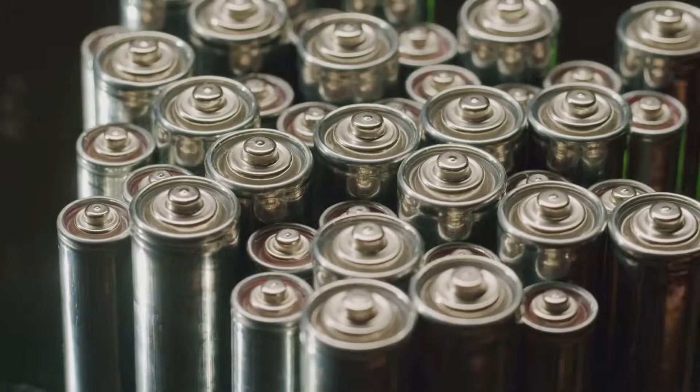Before you even leave the house, you have used many devices, and all of them have one thing in common: they are all powered by batteries. These small, silent power sources are the unseen engines of our modern world. They give life to the technology we depend on every single moment of every single day. We often forget they are there until they run out of power.

Batteries are everywhere. They are not just in the small gadgets we carry. They are in our cars, helping the engine start. They are in our laptops, allowing us to work from anywhere. They are in children's toys, bringing them to life with lights and sounds. They are in medical devices like pacemakers, keeping hearts beating steadily. They even power entire homes during blackouts.

These little packages of energy have quietly become a fundamental part of our infrastructure. Without them, our connected, mobile, and digital society would simply grind to a halt. The world as we know it would look very different.

Think about a world without portable power. Your camera would need to be plugged into a wall. Your remote control would not exist. Your car would need a hand crank to start, just like in the old days. The freedom to move, to communicate on the go, to have information at our fingertips, all of this is made possible by the humble battery.

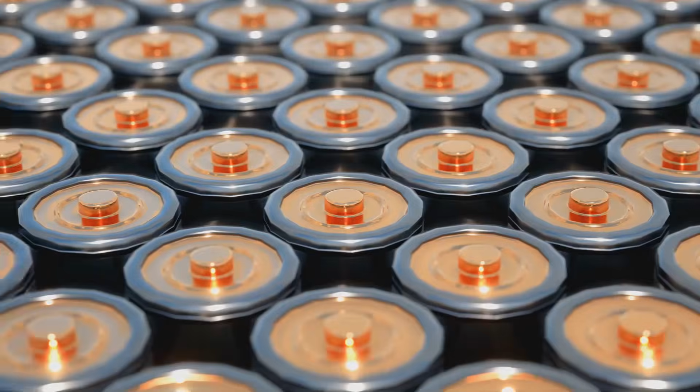It is a technology so successful and so widespread that it has become invisible. We expect our devices to work anywhere, anytime. This expectation is fulfilled by decades of battery innovation. It is a story of science, engineering, and manufacturing working together.

In this essay, we will pull back the curtain on these essential objects. We will journey from their simple beginnings to the complex factories that produce them by the billion. We will explore what a battery actually is and how it works. We will look at the different types, from the tiny cells in a watch to the massive packs in an electric car. Our main destination is the heart of it all, the modern battery factory. We will see how raw materials are transformed into reliable power sources. This is the story of the battery, an object you hold every day but may have never truly seen.

So what exactly is a battery? At its core, a battery is a self-contained chemical power pack. It is a device that stores chemical energy and converts it into electrical energy on demand. Think of it like a tiny, controlled power plant.

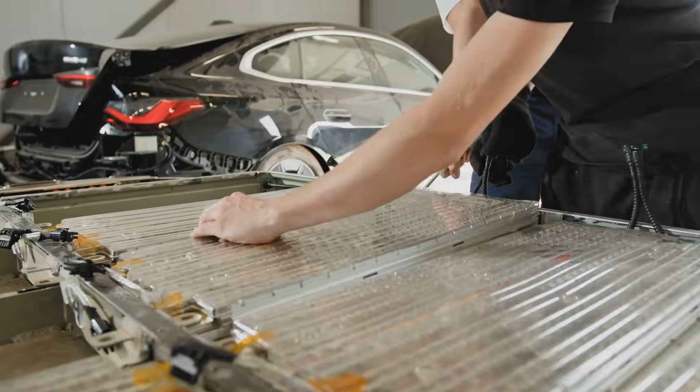Inside every battery, a chemical reaction is waiting to happen. When you put a battery into a device and turn it on, you complete a circuit. This allows the chemical reaction to start. Electrons begin to flow from one part of the battery to another. This flow of electrons is what we call electricity. It is this electricity that powers your device, making it work.

Every battery has three main parts. There is the negative terminal, called the anode. There is the positive terminal, called the cathode. And there is a chemical substance in between, called the electrolyte. The electrolyte separates the anode and the cathode.

When the circuit is closed, a chemical process begins. The anode gives up electrons and the cathode accepts them. The electrolyte acts as a gatekeeper, allowing ions to pass through but forcing the electrons to travel through the external circuit, your device. This journey of electrons is the electric current that brings your flashlight or phone to life. This simple principle is the foundation for all batteries.

However, not all batteries are created equal. Some are designed for single use. Once their chemical reaction is complete, they cannot be recharged. These are called primary batteries, like the common AA or AAA alkaline batteries.

Others are designed to be used again and again. These are called secondary or rechargeable batteries. In these batteries, the chemical reaction can be reversed. By applying an external electrical current, plugging it into a charger, you can restore the battery to its original state, ready to provide power once more.

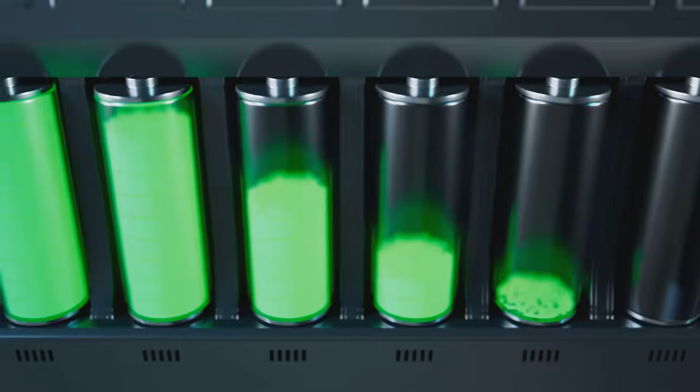This distinction between single-use and rechargeable batteries is crucial. It shapes how we use our technology and how we think about energy. A disposable battery in a smoke detector is perfect for long-term, low-power use. A rechargeable lithium-ion battery in a smartphone is essential for a device that is used heavily every day. The science inside each type is tailored for its specific job. Understanding this difference is the first step to appreciating the incredible engineering that goes into designing and manufacturing each and every battery we rely on. It is a universe of chemistry in a small, portable package.

The story of the battery did not begin with the digital age. It began over 2 centuries ago with a curious observation involving frog legs. In the late 1700s, an Italian scientist named Luigi Galvani noticed that a dead frog's legs would twitch when touched with 2 different types of metal. He believed this was due to animal electricity.

However, another Italian scientist, Alessandro Volta, had a different idea. He suspected the electricity was not coming from the frog, but from the metals themselves. This disagreement sparked a scientific revolution and set the stage for a world powered by portable energy.

To prove his theory, Volta created what is now known as the voltaic pile in the year 1800. He stacked alternating discs of zinc and copper, separating them with pieces of cardboard soaked in salt water. When he connected a wire to the top and bottom of the stack, it produced a steady, reliable electric current. This was the world's first true battery.

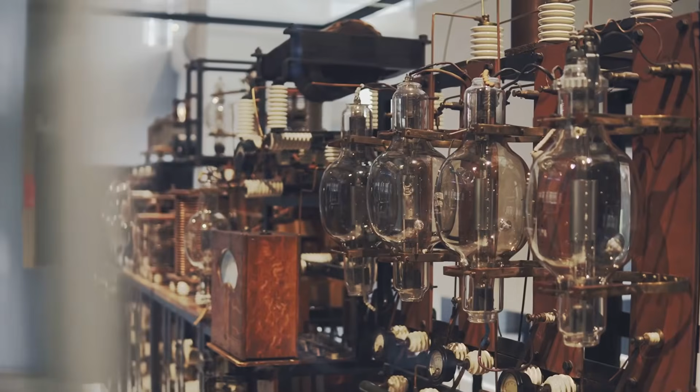Following Volta's breakthrough, the 19th century became a golden age for battery development. Scientists and inventors across Europe and America tinkered with different chemicals and materials to create better, longer-lasting batteries. In 1836, the Daniell cell improved on Volta's design, making it safer and more practical. Then, in the 1860s, the French inventor Georges Leclanche developed a new battery using a zinc anode and a manganese dioxide cathode. This design, known as the Leclanche cell, was the direct ancestor of the common zinc-carbon batteries that powered the first flashlights and radios for decades.

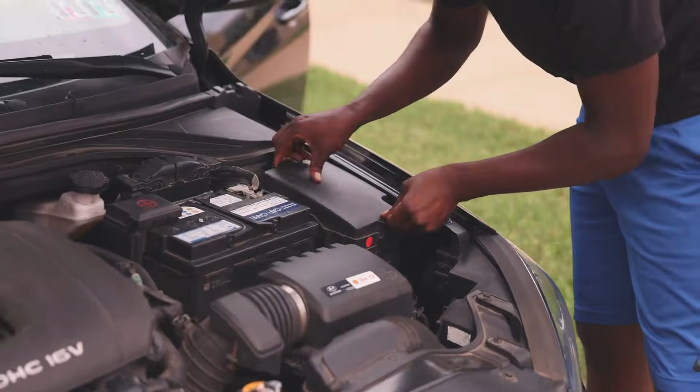The invention of rechargeable batteries marked another huge leap forward. In 1859, Gaston Plante created the first practical lead-acid battery. This was the first battery that could be discharged and recharged multiple times, making it incredibly useful for storing energy. This is the same basic technology that is still used in the car battery under the hood of most gasoline-powered vehicles today.

From a twitching frog leg to a stack of metal discs to the first rechargeable cell, these early discoveries laid the chemical and electrical groundwork for the billions of batteries that are manufactured in factories around the globe today.

Our journey into the world of batteries now brings us to the present day. We have seen how a simple chemical principle powers our lives. We have touched on the long history of invention that made it all possible. Now it is time to step inside the place where this magic happens, the modern battery factory.

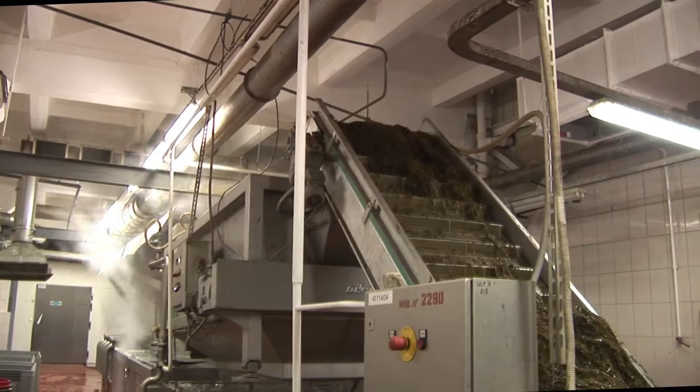These are not simple workshops. They are highly advanced, incredibly clean, and precisely controlled environments. Here, raw materials like lithium, graphite, manganese, and zinc are transformed into the sleek, powerful batteries we know and use every day. It is a process of immense scale and precision.

In the sections that follow, we will take a detailed tour of one of these amazing facilities. We will follow the journey of a battery from start to finish. Our tour will begin with the raw materials.

We will see how massive rolls of metal foil are coated with carefully mixed chemical slurries. This step is the heart of the battery, creating the anode and cathode that will store and release energy. The precision required here is astonishing. The thickness of these coatings must be controlled down to the micron, a fraction of the width of a human hair, to ensure the battery performs reliably and safely.

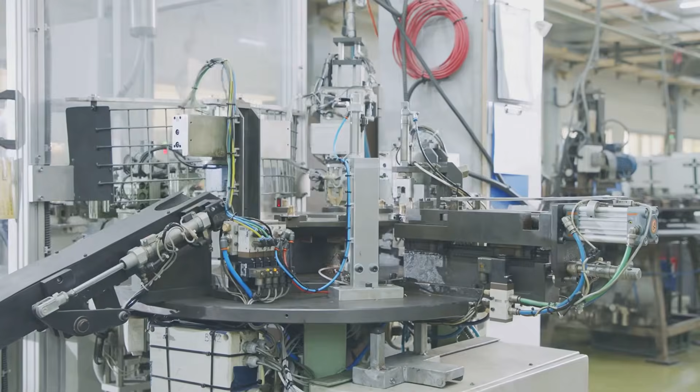Next, we will move to the assembly line. Here, the coated foils are cut, stacked, or wound into tight spirals, depending on the type of battery being made. Whether it is a cylindrical AA cell or a flat rectangular smartphone battery, the process is one of meticulous layering. The anode, cathode, and a special separator film must be perfectly aligned to prevent short circuits. Much of this work is done by automated machines in dry rooms, which have extremely low humidity. This is because the chemicals inside are highly sensitive to moisture, which can ruin a battery before it is even finished.

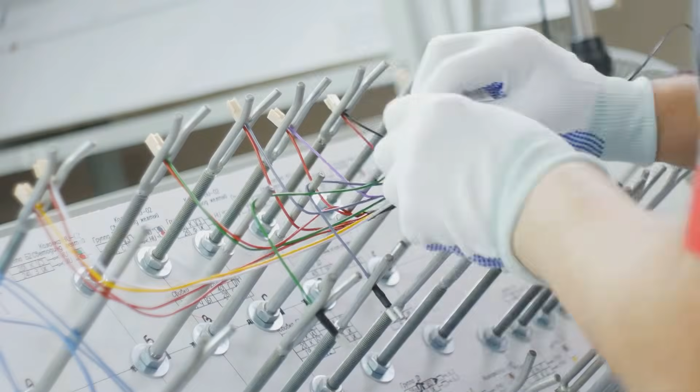Finally, we will witness the finishing touches. The assembled battery components are placed into their final casing. A small amount of electrolyte is injected, and the cell is sealed. But the process does not end there. Every single battery must undergo a series of rigorous tests. It will be charged and discharged, checked for leaks, and tested for its capacity and voltage. This quality control is essential to ensure that every battery that leaves the factory is safe, reliable, and ready to power our world. This behind-the-scenes look will reveal the hidden complexity behind one of modern life's most essential products.

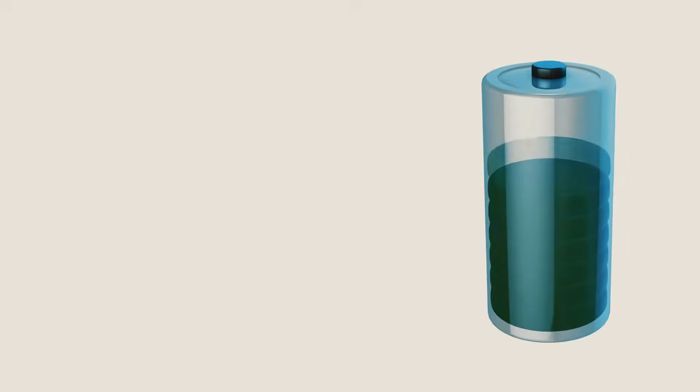Our story of the battery often begins in the 18th century, but some discoveries suggest a much older origin. In 1936, workers excavating a village near Baghdad, Iraq, unearthed a curious artifact: a small clay jar about 5 inches tall. Inside was a copper cylinder, and suspended within it was an iron rod, held in place by an asphalt plug.

Archaeologists dated the object to the Parthian period, around 250 BC. Named the Baghdad Battery, this object has puzzled historians and scientists ever since. Its construction bears a striking resemblance to a simple galvanic cell, the basic structure of a battery. Could ancient civilizations have harnessed electricity?

The theory is, honestly, quite tantalizing. If the jar were filled with an acidic liquid such as vinegar or grape juice, it could have produced a small but noticeable electric voltage. While there is no direct evidence of wires or devices it might have powered, its design is undeniably provocative. Some scholars speculate it could have been used for electroplating, coating one metal with a thin layer of another, like silver or gold. This would have required a low, steady current, exactly what a simple battery like this could provide, explaining a level of craftsmanship in ancient artifacts that has long been admired.

Other experts remain skeptical, proposing alternative functions for the mysterious jar. Perhaps it was simply a vessel for storing sacred scrolls, with the metals and asphalt serving to protect the delicate papyrus from the elements. The metals might have degraded over time, leaving behind the structure we see today. Without any accompanying written records describing its use, the true purpose of the Baghdad battery remains shrouded in mystery. There is no definitive proof that our ancestors understood the principles of electrochemistry.

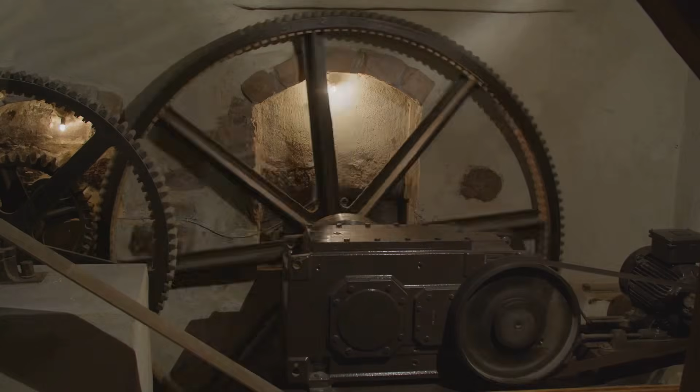The object stands as a fascinating anomaly, a what-if in the long history of human invention and discovery. Whether it was a true battery or a simple container, the Baghdad battery forces us to reconsider the timeline of technology. It serves as a powerful reminder that the spark of human ingenuity is not confined to one time or place. The desire to understand and manipulate the world around us is an ancient one.

While the verifiable history of the battery begins much later, this small clay pot from ancient Mesopotamia hints that the fundamental components of electrical discovery may have been in our hands for millennia, just waiting for the right mind to connect the pieces and unlock their incredible potential. It is, truly, an electrifying prologue to our story.

Before Alessandro Volta could build his famous pile, the world first needed to understand electricity itself. For centuries, the only known form of electricity was static electricity. The ancient Greeks knew that rubbing amber with fur would cause it to attract light objects like feathers. The Greek word for amber is electron, which is actually where our word electricity comes from.

For over 2,000 years, this strange, attractive force remained a mere curiosity, a bit of a parlor trick for the wealthy and a subject for philosophical debate. It was a force that could be created in a brief spark, but could not be sustained or harnessed for any practical use. The 17th and 18th centuries, a period known as the Age of Enlightenment, changed everything.

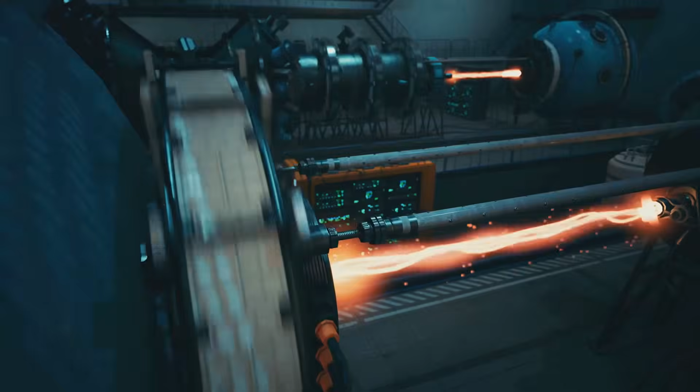This was an era of intense scientific inquiry, where observation and experimentation replaced superstition. Scientists began to systematically investigate the properties of static electricity. Inventors created machines with spinning glass globes and friction pads that could generate large amounts of static charge. One of the most significant inventions was the Leyden jar in 1745, the first device capable of storing a significant electrical charge. It was, in essence, the first capacitor, a close cousin to the battery.

The Leyden jar allowed for more powerful and dramatic experiments. Benjamin Franklin famously used one in his legendary kite experiment in 1752, proving that lightning was a form of electricity. These experiments captured the public imagination and spurred further research.

However, the Leyden jar had a major limitation. It could store a charge, but it released it all at once in a single, powerful spark. It could not provide a continuous flowing current. The world still lacked a source of electricity that was steady and controllable, something that could do more than just create a momentary flash of light or a jolt. This is where the stage was set for the next great leap forward.

The scientific community was buzzing with questions about the nature of electricity. They had learned how to generate it, store it, and discharge it in a burst. They had even begun to suspect a link between electricity and chemical processes, thanks to experiments like those of Luigi Galvani and his twitching frog legs. All the necessary ingredients were there: the metals, the chemical knowledge, and the burning curiosity. The world was waiting for someone to put them all together in the right way to create not just a spark, but a continuous, life-altering flow.

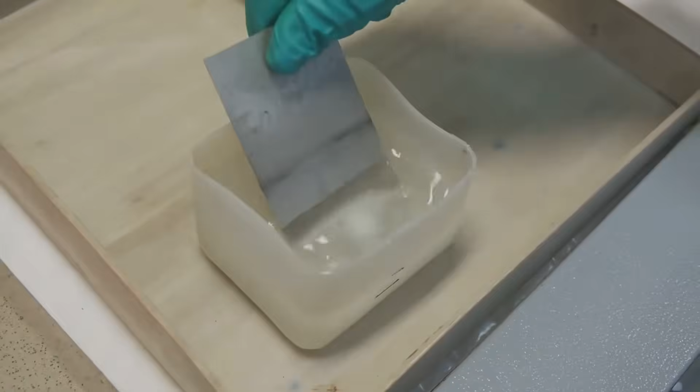The critical breakthrough came from a scientific disagreement. Luigi Galvani believed the electricity he observed came from the frog's tissue, a form of animal electricity. But Alessandro Volta, a professor of physics at the University of Pavia, was not convinced. He hypothesized that the current was generated not by the animal, but by the contact between two different metals in a moist environment. To prove his point, he set out to create an artificial source of electricity, one that required no living tissue whatsoever. He wanted to replicate the effect using only inorganic materials, to show the world the true source of this power. After extensive experimentation, Volta announced his success in a letter to the Royal Society of London in 1800.

His invention was elegantly simple. He created a stack, or pile, of alternating discs of two different metals, typically zinc and copper. Between each pair of metal discs, he placed a piece of cardboard or cloth soaked in brine, which is salt water or a weak acid. This soaked material acted as the electrolyte. When he connected a wire to the top and bottom of this tall stack, it produced a stable and continuous electric current, far more useful than the fleeting spark of a Leyden jar. The voltaic pile was born.

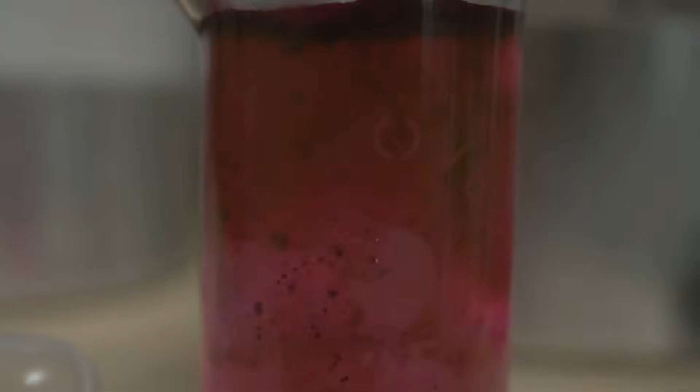This invention was nothing short of revolutionary. For the very first time in history, humanity had a reliable and lasting source of electricity. Volta's pile was not just a scientific curiosity, it was a practical tool. Scientists could now perform experiments that were previously impossible. They could study the effects of a continuous current on chemical compounds, a field that became known as electrochemistry. Sir Humphry Davy, for example, used a massive voltaic pile to isolate new chemical elements like sodium and potassium for the first time, proving they existed within common compounds. The battery had become an engine of discovery.

Volta's achievement fundamentally changed our relationship with energy. It demystified electricity, moving it from the realm of natural phenomena like lightning into the world of controlled, man-made technology. The pile proved that electricity could be generated through a chemical reaction, stored, and then released in a controlled flow. This was the foundational principle upon which all modern batteries are built. Every time you charge your phone or start your car, you are using a direct descendant of Volta's humble stack of metal discs and salty cardboard. His invention did not just create a current, it opened the floodgates for the electric age.

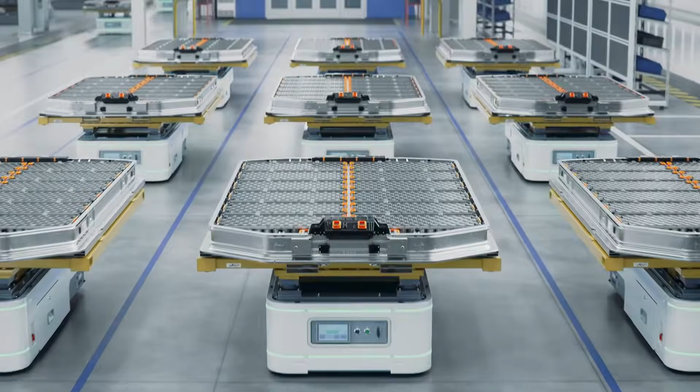With the blueprint provided by Volta, the 19th century witnessed a flurry of innovation in battery technology. Scientists and inventors immediately began to work on improving the voltaic pile, which, for all its brilliance, had its flaws. The original pile could not provide a strong current for very long, and it had a tendency to leak its corrosive electrolyte. The race was on to build a better battery, one that was more powerful, longer lasting, and more practical for a wider range of applications. This period became a kind of chemical arms race, with each new design attempting to outperform the last.

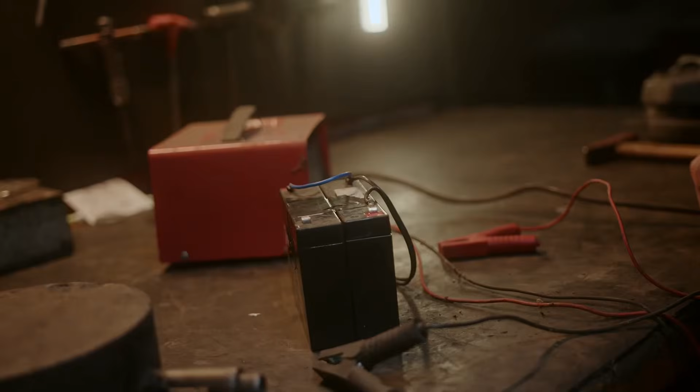A significant improvement arrived in 1836 with the Daniell cell, invented by British chemist John Frederick Daniell. His design cleverly solved the pile's biggest problem, a phenomenon called polarization, where hydrogen bubbles would form on the copper electrode, reducing the battery's effectiveness. Daniell's cell used two different electrolyte solutions separated by a porous clay pot. This prevented the bubble formation and resulted in a much more stable and reliable current. The Daniell cell became the first truly practical source of electricity for new technologies like the telegraph, which required a steady voltage over long periods.

The next major leap forward was the development of the wet cell by French inventor Georges Leclanché in the 1860s. His design used a zinc anode and a manganese dioxide cathode mixed with carbon powder, immersed in a jar of ammonium chloride solution. The Leclanché cell was more robust, cheaper to produce, and required less maintenance than the Daniell cell. More importantly, it laid the groundwork for the first dry cell.

By adapting Leclanche's chemistry into a sealed, paste-based electrolyte, inventors created the first portable batteries, paving the way for consumer devices like the flashlight. Perhaps the most impactful invention of this era was the first rechargeable battery.

In 1859, French physicist Gaston Plante developed the lead-acid battery. He placed two sheets of lead, separated by a rubber strip, into a solution of sulfuric acid. By passing a current through the cell, he could charge it, and then the cell could discharge to provide power. The process was reversible. This was a monumental breakthrough.

For the first time, electrical energy could be stored for later use. Plante's basic design is so effective that it remains the core technology for the starter batteries found in virtually all gasoline-powered cars today.

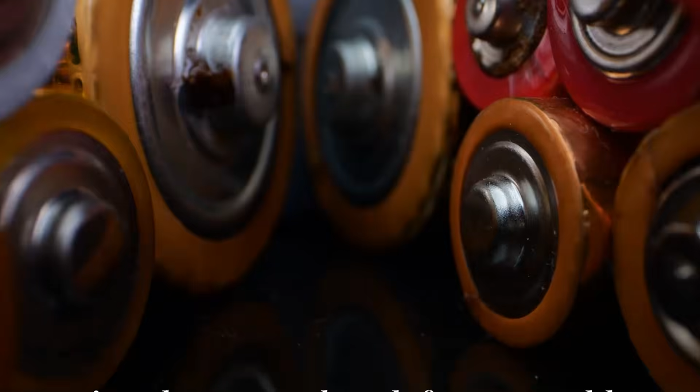By the end of the 19th century, the fundamental science of the battery was firmly established. The pioneering work of Volta, Daniell, Leclanche, and Plante had created a diverse toolkit of electrochemical solutions. These were no longer just laboratory curiosities. They were becoming essential components of an increasingly industrial and interconnected world.

Telegraph networks that spanned continents relied on steady currents from Daniell cells. Early telephone systems used Leclanche cells to power their signals. The groundwork had been laid for a world where power was no longer tethered to a large, stationary generator.

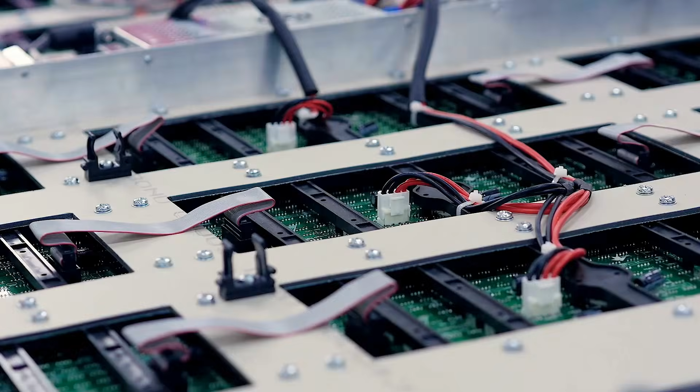The development of the dry cell was a critical turning point in making this power personal and portable. By replacing the liquid electrolyte with a moist paste, batteries could be sealed, made in various sizes, and used in any orientation without spilling. This innovation, commercialized in the 1880s, unlocked a world of possibilities. It led directly to the first consumer battery-powered device, the flashlight, introduced in 1899.

Suddenly, people could carry a source of light in their pockets. This simple convenience was a profound shift, demonstrating the liberating potential of portable power for the average person.

This era of discovery defined the core chemistries that would dominate the battery market for the next century. Zinc-carbon batteries, direct descendants of the Leclanche cell, would power radios, toys, and gadgets for decades. Lead-acid batteries, born from Plante's invention, became the standard for transportation and industrial energy storage, a role they still hold.

The principles of using a chemical reaction to create a flow of electrons, and in some cases, reversing that reaction, were now well understood. The focus of innovation began to shift from pure discovery to manufacturing, refinement, and cost reduction.

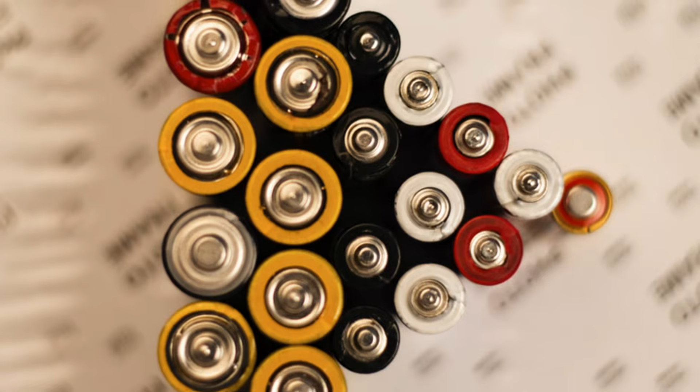The spark of discovery, which began with a twitching frog leg and was fanned into a flame by Volta's pile, had now become a steady, reliable burn. The scientific foundation was complete. Humanity had learned how to bottle lightning.

The next chapter in the story of the battery would not be about inventing the first cell, but about learning how to produce billions of them. The challenge moved from the scientist's laboratory to the engineer's factory, setting the stage for the mass production that would truly power the modern world and all the devices we now take for granted.

When you think of a battery, the first image that probably comes to mind is the small, familiar cylinder of a AA or AAA cell. These are the undisputed workhorses of the battery world, powering countless devices in our homes. From the television remote control to your wireless mouse, from children's toys to wall clocks, these batteries are everywhere.

They are a perfect example of a primary battery, meaning they are designed for single use. Once the chemical energy inside them is depleted, they are meant to be disposed of, hopefully through recycling. Their widespread use comes down to their reliability, low cost, and standard sizing.

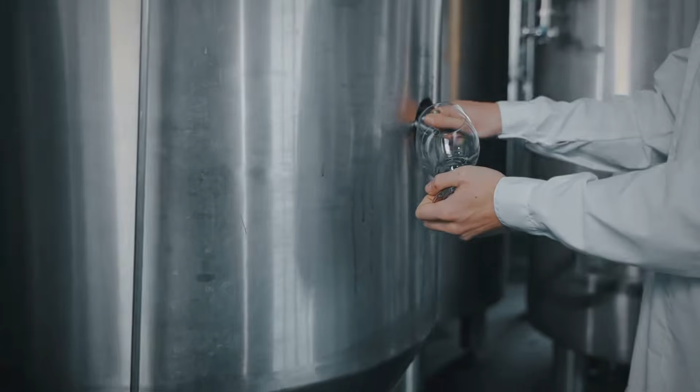These common batteries are most often alkaline batteries. This name refers to the chemistry inside them. They use zinc for the negative electrode, or anode, and manganese dioxide for the positive electrode, or cathode. The key ingredient that gives them their name is the electrolyte, which is a potassium hydroxide solution, a strong alkaline substance.

This chemical combination is more potent and energy-dense than the older zinc-carbon batteries they replaced. This means an alkaline battery can last much longer and provide a stronger, more consistent power output, making it ideal for devices that need a bit more energy, like a digital camera's flash or a motorized toy.

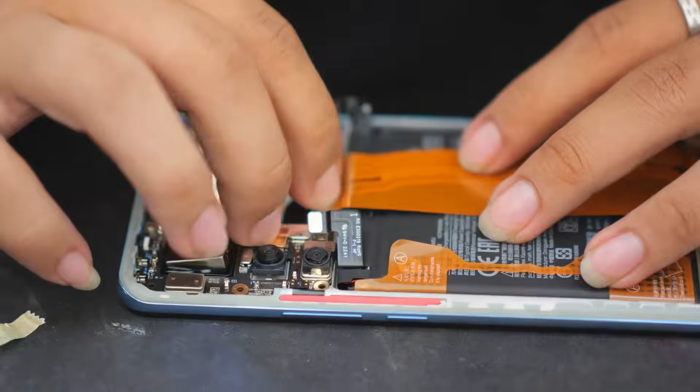The genius of these batteries lies not just in their chemistry, but in their standardized design. The AA, AAA, C, and D cell sizes were established decades ago to create a universal system for portable devices. This means you can buy batteries from any brand, anywhere in the world, and be confident they will fit your device.

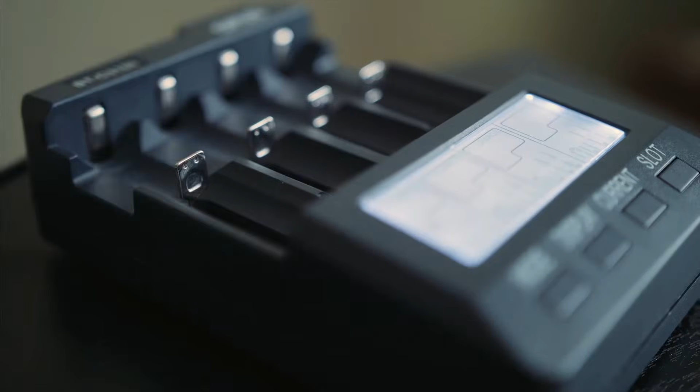Before the dominance of lithium-ion, two main types led this charge: nickel-cadmium, or NiCd, and nickel-metal hydride, or NiMH. These batteries, often made in the same familiar AA and AAA sizes, offered a revolutionary proposition.

Instead of throwing a battery away when it died, you could simply place it in a charger and use it again, hundreds of times. This was honestly a game changer for devices like portable music players, early digital cameras, and handheld video game consoles.

Nickel-cadmium batteries were among the first widely available rechargeable options. They were rugged and could deliver a high current, making them excellent for power tools and other high-demand applications.

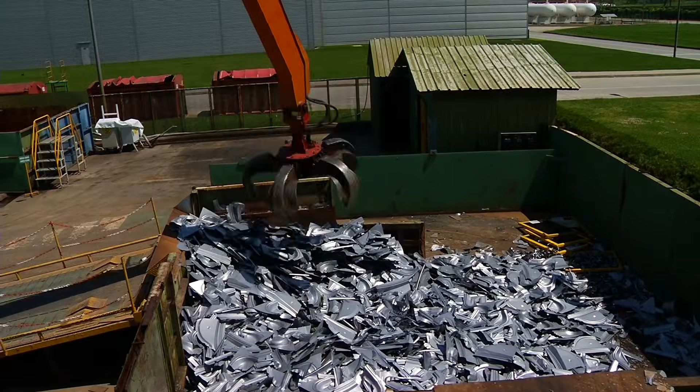However, they had a few significant drawbacks. The cadmium used in them is a highly toxic heavy metal, making their disposal an environmental concern. More famously, NiCd batteries suffered from what's called a memory effect.

If you repeatedly recharged them before they were fully drained, they would remember this shorter cycle, and their total capacity would appear to decrease over time, which was a frustrating quirk for users.

To address these problems, the nickel metal hydride, or NiMH, battery was developed. It offered a significant improvement over its predecessor. NiMH batteries have a higher energy density, meaning they can store more power in the same size cell, allowing your devices to run longer on a single charge.

They also do not suffer from the severe memory effect of NiCd batteries, making them much more user-friendly. Most importantly, they are made with more environmentally friendly materials, replacing the toxic cadmium with a hydrogen-absorbing alloy.

This made NiMH the preferred rechargeable choice for consumer electronics throughout the 1990s and 2000s. The rise of NiCd and NiMH batteries marked a fundamental shift in how we thought about portable power. It introduced the concept of an energy cycle: use, recharge, repeat.

This not only saved consumers money in the long run, but also represented a step toward greater sustainability by reducing the number of single-use batteries being thrown away.

While they have now been largely surpassed by newer technologies for high-performance devices, NiMH batteries are still widely used today in many household applications. They represent a crucial bridge between the disposable battery era and the fully rechargeable world we now live in.

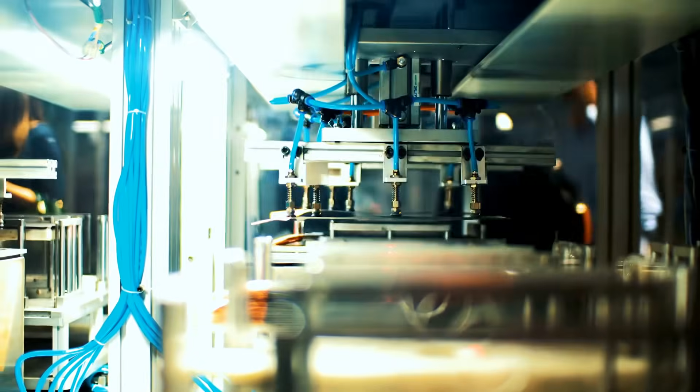Today, one type of battery reigns supreme over the world of high-performance portable electronics, the lithium-ion battery. If you think about it, your smartphone, your laptop, your wireless headphones, or your tablet, they are all powered by this incredible technology.

Lithium-ion or Li-ion batteries have completely transformed our digital lives by offering an unmatched combination of high energy density, lightweight, and excellent rechargeability. They can pack a huge amount of power into a very small and light package, which is exactly what modern, slim, and powerful personal devices require.

This is the technology that untethered us from the wall socket.

The secret to the lithium-ion battery's success lies in its core component, lithium. Lithium is the lightest of all metals and has fantastic electrochemical properties, meaning it can store and release a large amount of energy.

Inside a Li-ion battery, lithium ions shuttle back and forth between the anode, which is typically made of graphite, and the cathode, which is made of a lithium metal oxide, during charging and discharging.

This process is incredibly efficient and can be repeated hundreds or even thousands of times with very little degradation. Unlike NiCd batteries, Li-ion batteries have no memory effect, so you can top them up whenever you like without harming their long-term capacity.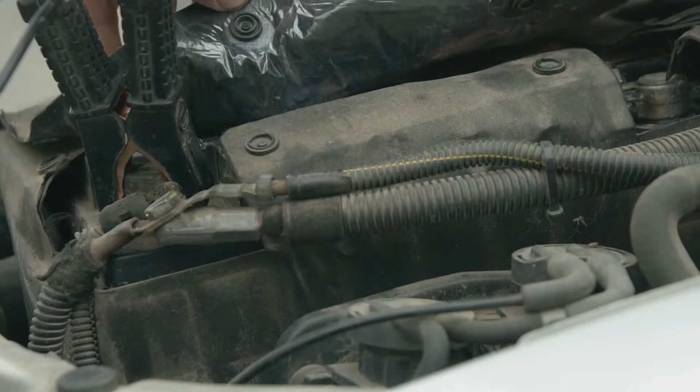This technology is not just limited to small gadgets. Lithium-ion batteries are the driving force behind the electric vehicle revolution.

By connecting thousands of individual Li-ion cells together into massive battery packs, engineers can create a power source strong enough to propel a car for hundreds of miles on a single charge.

This application has pushed Li-ion technology to its limits, driving innovations in energy density, charging speed, and safety. The same basic chemistry that lets you watch videos on your phone for hours is also helping to reshape the future of transportation and reduce our reliance on fossil fuels.

Despite their incredible advantages, lithium-ion batteries come with their own set of challenges. The materials inside, particularly lithium and cobalt, are expensive, and their mining can have significant environmental and social impacts. They also contain a flammable electrolyte, and if the battery is damaged, punctured, or improperly charged, it can lead to a dangerous situation known as thermal runaway, where the battery overheats and can catch fire.

As a result, every Li-ion battery contains sophisticated safety circuits to manage its temperature and voltage, ensuring it operates safely within its limits. They are the undisputed kings of portable power, but they are also a technology that demands our respect and care.

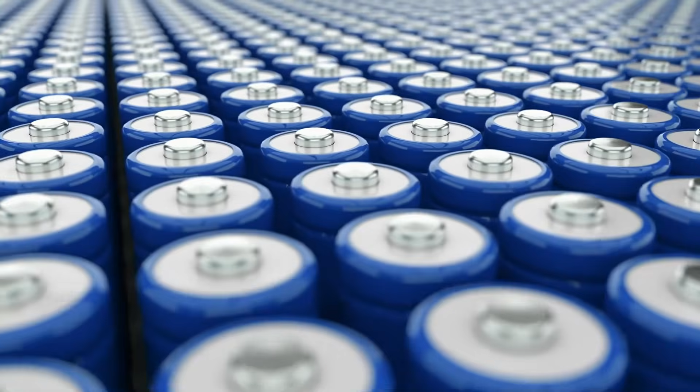For over 160 years, this design has remained the standard for what is known as an SLI battery: starting, lighting, and ignition. Its primary job is not to power the car for long distances, but to provide the massive jolt of electricity needed to turn over the heavy internal combustion engine. It is honestly the unsung hero that brings your car to life with the turn of a key or the push of a button.

A lead-acid battery is a perfect example of function over form. It is heavy, bulky, and filled with a corrosive liquid electrolyte, sulfuric acid. Inside its black plastic box are a series of lead plates, or grids, that serve as the electrodes. One set of plates is made of pure lead, while the other is coated in lead dioxide. When you start your car, these plates undergo a powerful chemical reaction with the acid, releasing a huge surge of electrical current for a few seconds.

Once the car's engine is running, the alternator takes over, powering the car's electronics and, crucially, recharging the battery for its next job.

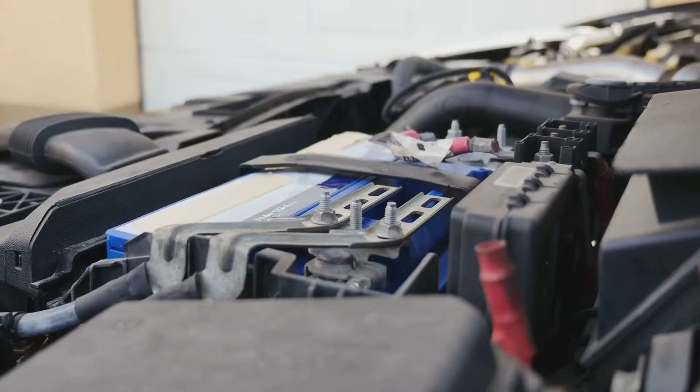One of the main reasons for the lead-acid battery's longevity is its low cost and incredible reliability. The materials, lead and sulfuric acid, are inexpensive and widely available. The manufacturing process is mature and well understood, making them cheap to produce. They are also extremely dependable in a wide range of temperatures, from freezing cold winters to scorching hot summers. This robustness is essential for a component that sits under the hood of a car, exposed to vibration, heat, and the elements. Its ability to provide a high cranking power reliably makes it perfectly suited for its specific, demanding task.

Another surprising advantage of the lead-acid battery is its status as one of the most recycled consumer products in the world. Due to the value of the lead and the hazardous nature of the acid, a highly effective and widespread recycling infrastructure has been built up over decades.

When your old car battery is replaced, it is almost certain to be sent to a special facility where over 99% of its materials can be recovered and reused to make new batteries. In this regard, the old heavy lead-acid battery is a model of a circular economy, proving that even century-old technology can teach us valuable lessons about sustainability.

Beyond the common cylinders and rectangles that power our lives, there exists a vast world of specialty batteries designed for very specific jobs. These batteries come in all shapes and sizes, each with a unique chemistry tailored to its application.

One of the most common types is the button cell, also known as a coin cell. These tiny, flat, disc-shaped batteries are essential for devices where space is extremely limited. You will find them in wristwatches, hearing aids, small electronic calculators, and on the motherboards of computers, where they provide power to maintain the system clock and settings.

Button cells are a marvel of miniaturization. Despite their small size, they are engineered to provide a very stable voltage over a long period, often for years. Different chemistries are used depending on the need.

For example, silver oxide cells are often used in watches because they provide a very steady voltage, which is crucial for accurate timekeeping. Lithium coin cells, like the common CR2032, offer a higher voltage and a very long shelf life, making them perfect for applications like car key fobs or computer motherboards, where they might sit unused for long periods but must work when needed.

Another category of specialty batteries includes those designed for extreme conditions or life-critical applications.

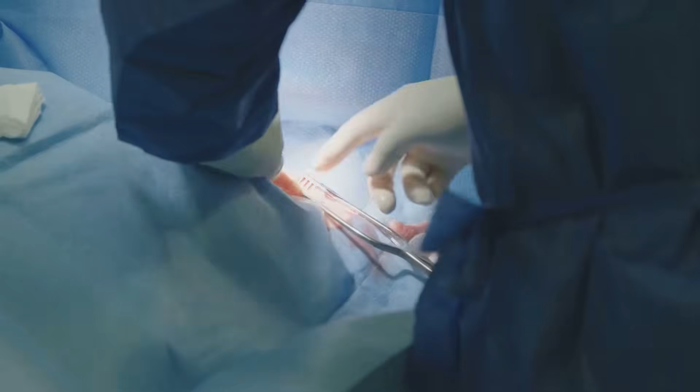Medical devices such as pacemakers require batteries that are incredibly reliable, have a very long lifespan, and are hermetically sealed to be safe inside the human body. These often use a specialized chemistry like lithium iodide, which can last for a decade or more.

Similarly, batteries used in military, aerospace, or deep-sea exploration applications must be able to withstand extreme temperatures, pressures, and vibrations that would cause a standard consumer battery to fail catastrophically. These are custom-engineered power sources built for ultimate reliability.

This diversity shows that there is no single best type of battery. The ideal choice always depends on the job it needs to do. A tiny, low-power button cell for a watch has completely different requirements from a high-power, rechargeable lithium-ion pack for an electric drill, or a heavy, high-current lead-acid battery for a car.

Each type represents a unique solution to a specific engineering problem, a careful balancing act of cost, size, power, lifespan, and safety. This vast ecosystem of battery types ensures that for every technological need, there is a specialized power source waiting to bring it to life.

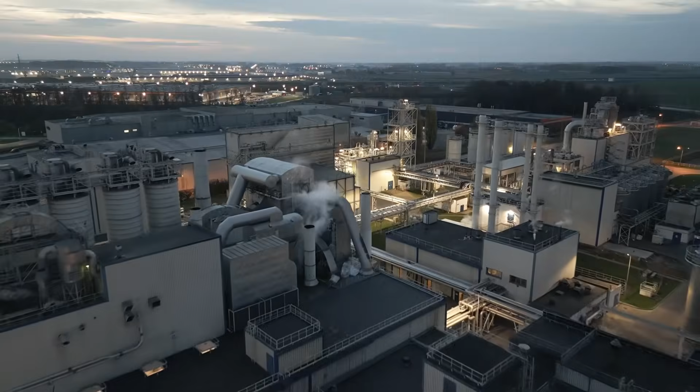Our journey into the heart of battery manufacturing begins long before the first machine whirs to life on the factory floor. It starts in the minds of engineers and chemists, in a stage of meticulous design and material selection.

Every battery, whether a tiny button cell or a massive electric vehicle module, is a precisely engineered system. The final application dictates every choice. Will it need to deliver a huge burst of power for a moment, like a car battery, or provide a steady, low current for years, like a pacemaker battery? The answers to these questions determine the blueprint for its construction and the specific raw materials that will be used in its creation.

The selection of raw materials is a critical first step, a global scavenger hunt for the planet's most electrochemically active elements. For a modern lithium-ion battery, the shopping list is extensive and specific.

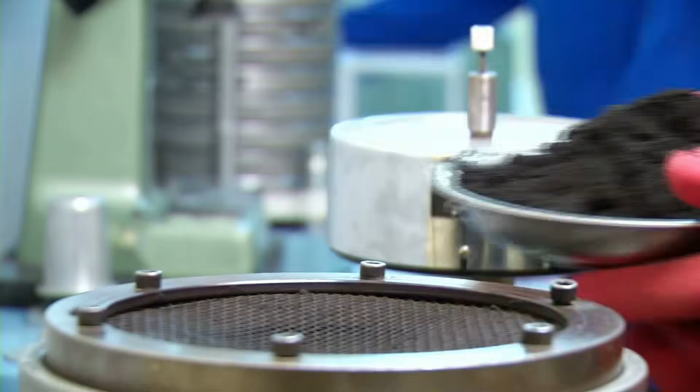Giant rolls of paper-thin copper and aluminum foil are procured to serve as the current collectors. Highly purified graphite powder is sourced for the anode, the negative electrode. For the cathode, the positive electrode, a complex cocktail of lithium, nickel, manganese, and cobalt oxides is required. These active materials are the very soul of the battery, the substances that will store and release the electrical energy we depend on for our daily lives.

Beyond the active materials, other crucial components must be sourced. A special polymer film, microscopically porous, is needed for the separator, the vital barrier that keeps the anode and cathode from touching and causing a short circuit.

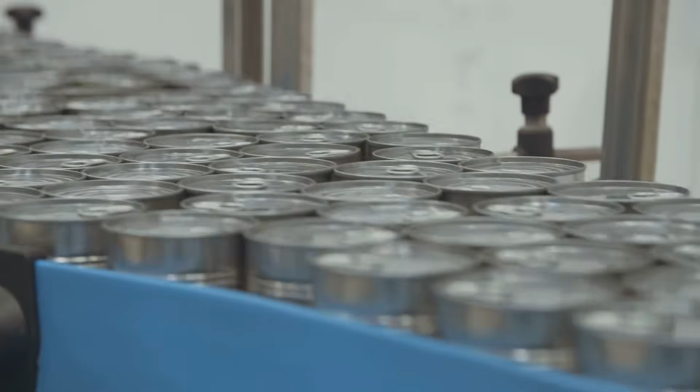A complex blend of organic solvents and lithium salts must be mixed to create the electrolyte, the liquid medium that allows ions to flow between the electrodes. Even the humble battery can, typically made of steel or aluminum, is carefully designed to be strong, lightweight, and corrosion-resistant. Each material is chosen for its specific properties, contributing to the battery's overall performance, safety, and longevity.

Once the design is finalized and the materials are gathered, they arrive at the factory ready for transformation. These materials don't just show up in bags and boxes, they arrive in immense quantities, often in a highly refined state. The factory itself is a symphony of logistics, ensuring a constant and pure supply of these essential ingredients.

The quality of these incoming raw materials is tested rigorously before they ever enter the production line. Any impurity, even at a microscopic level, could compromise the performance and safety of the final product. This initial stage of design and procurement lays the absolute foundation for the millions of reliable batteries that will soon roll off the assembly line.

The first major process inside the factory is the creation of the electrodes, the positive and negative poles of the battery. This is where the raw chemical powders are transformed into the active components of the cell.

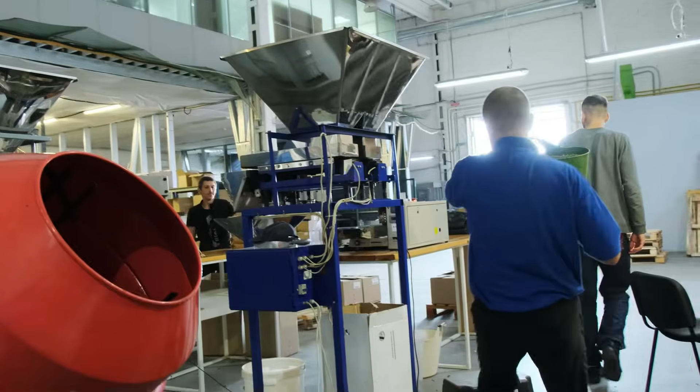The process begins in a massive industrial mixing room, which, honestly, resembles a high-tech bakery. Here, the active material powders, graphite for the anode, and the lithium metal oxide blend for the cathode, are poured into giant mixers. They are combined with a conductive additive, typically a form of carbon black to help electricity flow, and a binder, which is a special polymer glue that will hold everything together on the metal foil.

These dry ingredients are then mixed with a solvent to create a thick, dark, and perfectly uniform slurry. The consistency of this slurry is absolutely critical. It must be completely smooth with no clumps or air bubbles. Achieving this perfection requires hours of mixing under tightly controlled conditions of temperature and pressure.

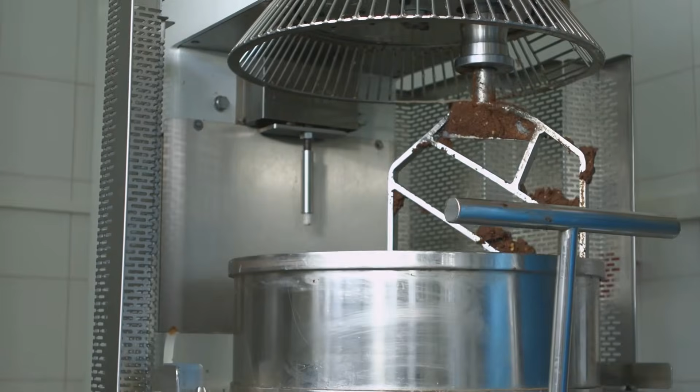The anode slurry, which is typically black due to the graphite, and the cathode slurry, often a dark grey or black, are prepared in separate, dedicated mixing systems to prevent any cross-contamination. This meticulous mixing process ensures that every part of the final electrode will have the same chemical properties and perform identically. Next, this precious slurry is transferred to the coating machine, a marvel of precision engineering that can be as long as a football field.

Here, the thin copper foil for the anode or aluminum foil for the cathode is unrolled and fed through the machine at high speed. A razor-sharp doctor blade or a series of rollers applies an incredibly precise layer of the slurry onto the foil. The thickness of this coating must be controlled with astonishing accuracy, often down to a single micron, which is 1/1000th of a millimeter. Even the slightest variation in thickness can affect the battery's capacity and lifespan, so laser measurement systems constantly monitor the process.

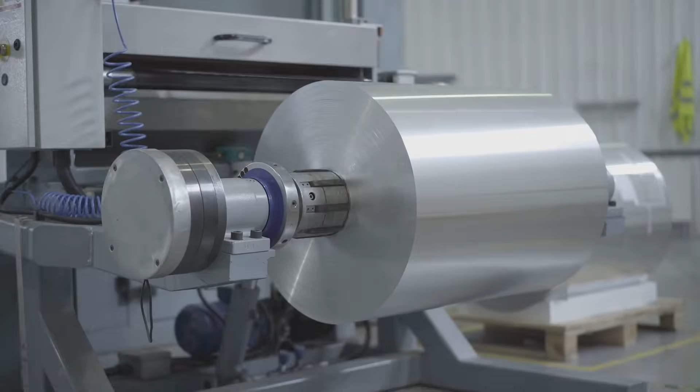After being coated, the wet foil passes through a long drying oven that can be over 100 feet long. This oven evaporates the solvent, leaving behind a dry, stable layer of the active material firmly bound to the metal foil. The foil is then sent through a set of massive high-pressure rollers in a process called calendering. This is like running dough through a pasta maker, compressing the coated material to achieve the perfect density and thickness.

The result is a massive roll of finished electrode material, the very heart of the battery, now ready to be cut and assembled into individual cells. This is where raw chemistry becomes functional technology.

Section 3, The winding road: assembling the jelly roll. With the massive rolls of anode and cathode material prepared, the next stage is to assemble them into a structure that can be placed inside a battery can.

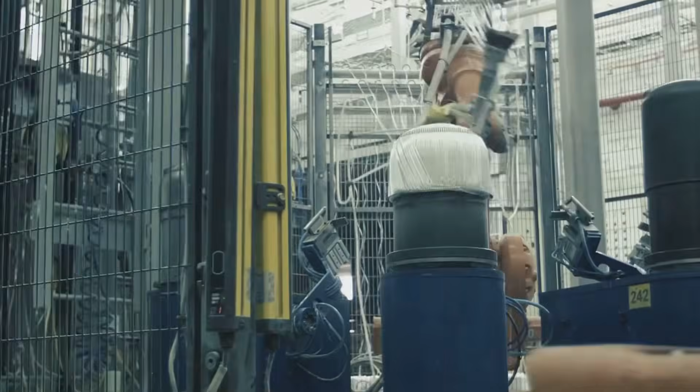For cylindrical cells like the common AA or the 18650 and 21700 cells used in everything from vape pens to electric cars, this is accomplished through a remarkable process of high-speed winding. The long sheets of coated foil are first slit into ribbons of the correct width for the specific battery size being produced. These ribbons of anode and cathode material are then fed into an automated winding machine, a blur of mechanical precision that carries out its task with incredible speed and accuracy.

The machine takes one ribbon of the anode, one ribbon of the cathode, and two ribbons of the porous separator film. The separator is the crucial safety component, a thin plastic membrane that physically separates the positive and negative electrodes while still allowing lithium ions to pass through its microscopic pores. The machine carefully layers them in a specific order: anode, separator, cathode, and another layer of separator. This sandwich of materials is then wound tightly around a central spindle or mandrel, creating a compact, round log.

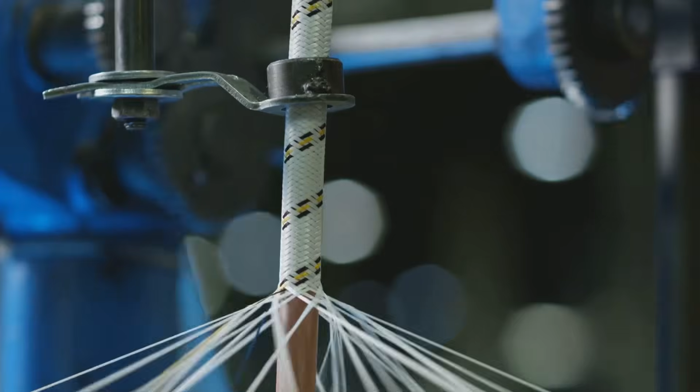This tightly wound structure is known as a jelly roll or a cell winding, a fitting name for its layered, spiral appearance. The precision required during this winding process cannot be overstated. The alignment of the layers must be perfect. The anode material is always made slightly wider than the cathode to prevent any chance of the cathode touching the edge of the anode, which could lead to a dangerous internal short circuit.

The tension of the winding must be exact. Too loose and the battery's performance will suffer. Too tight and the layers could be damaged. High-speed cameras and sensors monitor every single rotation, ensuring that each jelly roll is a perfect replica of the one before it, guaranteeing consistency across millions of cells.

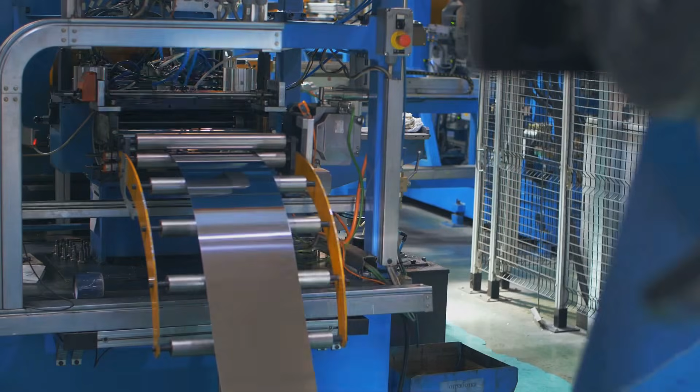Once the winding is complete, the machine automatically cuts the ribbons and tapes the end of the jelly roll to secure it. The finished jelly roll is then ejected onto a conveyor belt, ready for the next step.

For other types of batteries, like the flat pouch cells used in smartphones, the process is slightly different. Instead of being wound, the electrode sheets are cut into rectangular pieces and then stacked on top of each other with separators in between. Regardless of the method, whether winding or stacking, the goal is the same: to pack as much active electrode material as possible into a small, defined space, creating a dense, energy-rich core for the battery.

Section 4. The dry room, a controlled environment. Much of the battery assembly process, especially for high-energy lithium-ion cells, takes place in a highly specialized environment known as a dry room. This is not just a clean room. It is an area where the level of moisture in the air is controlled to an almost impossibly low level.

The air inside a dry room can be over 100 times drier than the air in the Sahara Desert. Workers entering these areas must pass through a series of airlocks and wear special lint-free suits, gloves, and masks to prevent any contamination from their bodies or clothing. The atmosphere is carefully managed and constantly monitored.

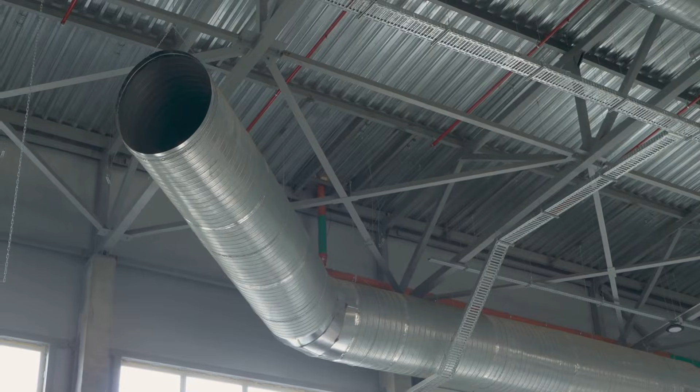Building and maintaining these dry rooms is a significant engineering challenge and a major cost for any battery factory. Massive dehumidifying systems work around the clock, using powerful desiccants to strip every last bit of water vapor from the air before it is pumped into the room. The rooms themselves are built to be almost perfectly airtight, with sealed walls, floors, and ceilings to prevent any moisture from leaking in from the outside.

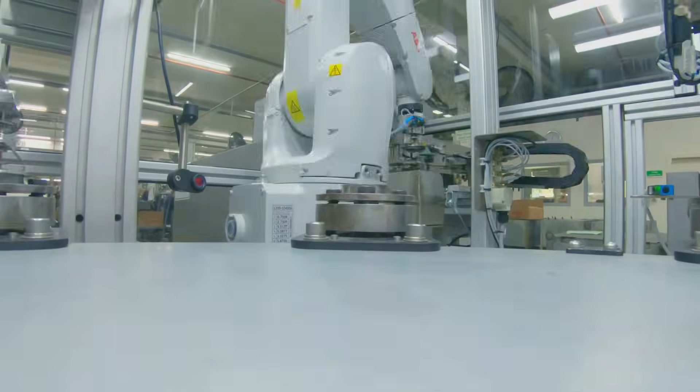The pressure inside the room is kept slightly higher than the surrounding areas, so if a small leak were to occur, dry air would flow out rather than moist air flowing in. Working in this environment is demanding for the technicians and engineers inside. The extremely dry air can be uncomfortable, and the need for full-body protective suits adds another layer of difficulty to their precise tasks. All the automated machinery used within the dry room must also be specially designed to operate in these low humidity conditions without generating static or shedding particles.

This commitment to an utterly dry environment is a non-negotiable part of modern battery manufacturing. It is a critical, hidden step that ensures every cell is built to last and to operate safely throughout its intended life.

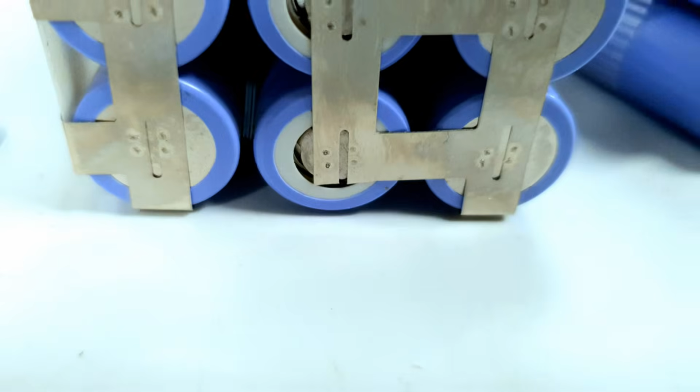Section 5. Bringing it to life. Electrolyte, filling and sealing. After the jelly roll has been meticulously assembled and inspected within the dry room, it is inserted into its protective metal casing, which is usually a steel or aluminum can. For a cylindrical cell, the jelly roll is slid into the can, and an electrical tab from the anode is welded to the bottom of the can, while the cathode tab is connected to the top cap assembly.

At this point, the battery is still just a dry, inert object. It has all the necessary components, but it lacks the one final ingredient that will allow it to come to life: the electrolyte. This is the moment the cell gets its soul.

The next step is the electrolyte filling process, a procedure that requires extreme precision and care. The open-topped cans, each containing a jelly roll, move along a conveyor to an automated filling station. Here, a precise nozzle injects an exact amount of the liquid electrolyte into each can. The volume must be perfect. Too little electrolyte and parts of the electrodes won't be able to participate in the chemical reaction, reducing the battery's capacity. Too much, and it could cause pressure issues when the battery heats up during operation.

The electrolyte itself is a carefully guarded trade secret, a cocktail of organic solvents and lithium salts designed for optimal performance and safety. Once filled, the cells are often left to rest for a period in a process called soaking or wetting. This allows the liquid electrolyte to fully seep into all the microscopic pores of the electrodes and the separator. It is crucial that the electrolyte makes complete contact with every surface of the active materials inside the jelly roll. This ensures that the entire volume of the electrode can be utilized, maximizing the battery's energy storage potential.

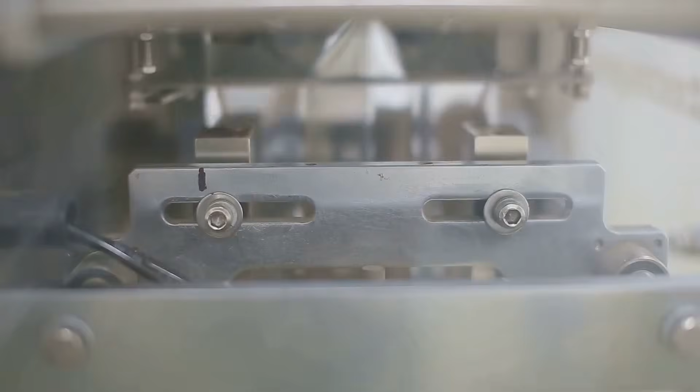Finally, the battery is ready to be sealed from the outside world. The top cap assembly, which includes safety features like a pressure vent, is placed on the can. A high-precision crimping or laser welding machine then creates a permanent, airtight seal. This seal is absolutely critical to the battery's safety and longevity. It locks the volatile electrolyte inside and keeps contaminants like oxygen and moisture out for the entire life of the battery. The cell is now a self-contained electrochemical power plant, fully assembled and sealed, but it is not yet ready for use. It still needs to be woken up.

So the newly sealed battery cell isn't actually a functional power source just yet. It's still in this inert, uncharged state. The next step in its journey is one of the most critical and time-consuming in the whole manufacturing process: formation. This is basically the battery's very first charge and discharge cycle, a carefully controlled electrical awakening.

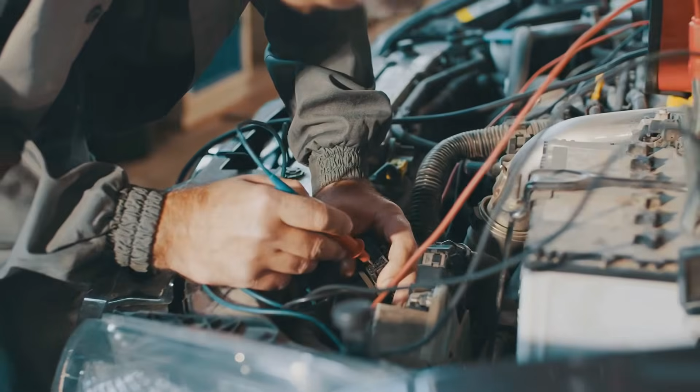At this stage, the cells are moved from the main assembly line into massive racks inside a temperature-controlled room. Here, every single cell is connected to a sophisticated charging system that will, bit by bit, gently apply an electrical current for the very first time in its life.

But this initial charge isn't just about putting energy into the battery. It's actually about creating a crucial internal component. As lithium ions travel from the cathode to the graphite anode for the first time, they interact with the electrolyte right at the surface of the anode. This reaction forms a microscopic stable film called the solid electrolyte interphase, or SEI layer.

Think of the SEI layer as a perfectly formed skin, protecting the anode from further reactions with the electrolyte. A well-formed SEI layer is absolutely essential for a long and stable battery life, because it lets lithium ions pass through, but it keeps the electrolyte from being consumed in unwanted side reactions.

The formation process is really this delicate dance of chemistry and electricity, and it can actually take several days to finish. The charging voltage and current are ramped up very slowly, following a specific profile. During this time, small amounts of gas can be generated inside the cell as a byproduct of the SEI formation. For pouch cells, you might even notice a slight swelling.

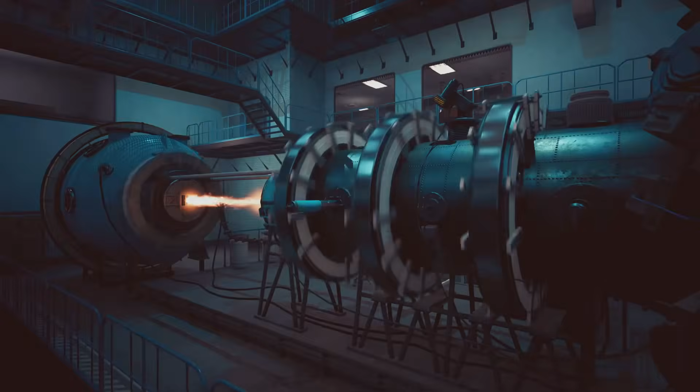After this initial charge, the cells are moved to a degassing machine. This machine punctures a small, designated tab on the pouch, releases the trapped gas in a vacuum, and then reseals the cell permanently. It's a vital step for both safety and for the final shape of the battery.

But even after the initial formation cycle and degassing, these batteries are not immediately ready to ship. Next, they enter another quiet but essential phase: aging. The fully charged cells are stored on racks in a temperature-controlled room for a period that can range from a week to nearly a month. During this time, their open circuit voltage is meticulously monitored by a computer system. This aging process allows the internal chemistry of the cell to stabilize.

More importantly, it serves as a powerful quality control check. Any cell with a manufacturing defect, like a microscopic internal short, will show a slight drop in voltage during this period and can be identified and removed from the batch.

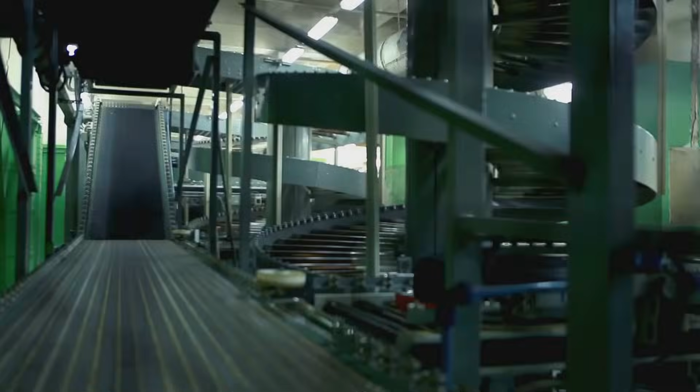After making it through the long aging process, the batteries are finally ready for their last set of exams. This is the final stage of quality control, a rapid-fire series of automated tests to make sure that every single cell meets the exact specifications required by the customer. The cells are sent through a gauntlet of testing machines that check a wide range of parameters.

They're tested for precise voltage, internal resistance, and even their exact physical dimensions. High-speed, high-resolution cameras scan each cell for any external cosmetic defects, like scratches, dents, or faulty welds. And honestly, any cell that fails even one test is immediately rejected.

One of the most important tests is the capacity check. A sample of batteries from each batch, and sometimes every single battery, is put through a full charge and discharge cycle on a testing cycler. This machine precisely measures how much energy the battery can store and deliver, confirming that it meets its rated capacity in milliamp hours or amp hours.

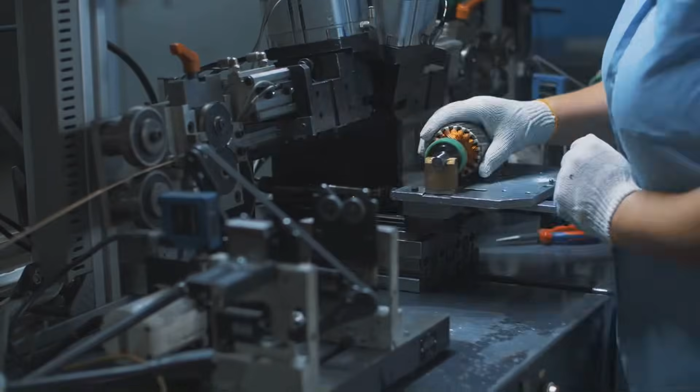Other tests might include checking the performance of safety features, like the pressure vent, to make sure they'll work correctly under fault conditions. This rigorous, multi-step testing process is really the factory's final promise of quality and safety to the end user.

For batteries that are destined for a larger pack, like those used in electric vehicles or laptops, there's an extra step: sorting and grouping. No two batteries are ever perfectly identical. There are always tiny variations in capacity and internal resistance. To build a high-performance battery pack, it's essential that all the cells within it are matched as closely as possible.

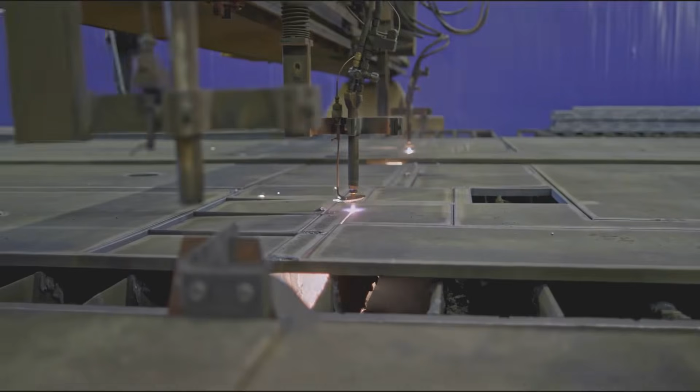Automated systems sort the finished cells into hundreds of different grades based on their test results. This ensures that, when the cells are welded together into a module, they'll all charge and discharge in unison, maximizing the pack's performance and lifespan.

Finally, the batteries that have passed every single test are ready for their journey out into the world. They're laser-etched with serial numbers and date codes for traceability. Depending on where they're headed, they might be wrapped in a protective PVC sleeve or placed into branded packaging. They're then carefully packed into special boxes, with dividers to keep them from touching and short-circuiting during transit. These boxes are labelled according to strict regulations for shipping lithium-ion batteries.

So, from a collection of refined powders and foils, a safe, reliable and powerful source of energy has been created, tested, and is now ready to power our world.

The most profound impact of modern batteries can be felt right in the palm of your hand. The smartphone, a device that's become almost an extension of ourselves, just wouldn't exist without the energy density and slim profile of the lithium-ion battery. This small, rechargeable power source is what allows a supercomputer to live in our pockets, connecting us to a global network of information, communication, and entertainment. It's what powers the brilliant display, the powerful processor, the high-resolution camera, and the array of sensors that make our phones so capable. The freedom to navigate a new city, capture a precious memory, or talk to a loved one across the globe, that's a freedom granted by the battery.

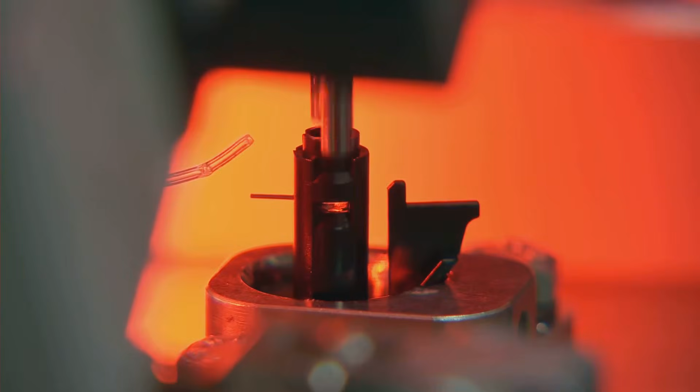This personal tech revolution, kick-started by the battery, just keeps accelerating. The next generation of wearable technology, augmented reality glasses, and interconnected smart devices will demand even more from their power sources. They'll need to be smaller, last longer, and charge faster. In many ways, the story of personal technology is really the story of the battery. As battery technology evolves, so too will the devices that shape our digital identity and mediate our experience of the modern world. The small batteries we carry with us every day aren't just accessories, they're the engines of our increasingly connected and mobile human experience.

The liberating power of the battery has radiated outwards from our pockets, fundamentally transforming the spaces where we live and work. Inside the home, a quiet revolution has taken place, one cord at a time. Think of the humble vacuum cleaner. Once a bulky machine that had to be dragged from room to room, tethered by a frustratingly short cord, it has been reborn as a lightweight, powerful, cordless stick vacuum. This freedom of movement is made possible by compact, energy-dense lithium-ion battery packs. And this same principle has been applied to countless other household tools, from kitchen blenders and mixers to garden trimmers and leaf blowers, making daily chores easier and more efficient.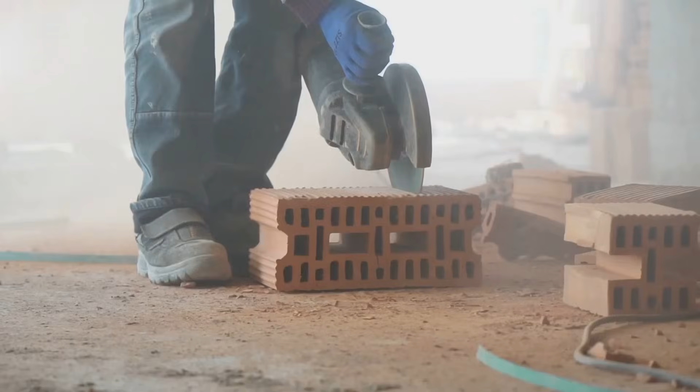The modern workplace has been similarly untethered. The rise of the laptop computer, powered by increasingly capable batteries, untied the professional from their desk. This trend has only accelerated, leading to the remote work culture that is now a reality for millions. The ability to work from a coffee shop, a park, or a home office is predicated on having a device that can last for hours without being plugged in. High-capacity batteries also power a new generation of cordless power tools on construction sites, giving workers unprecedented freedom and safety, eliminating the hazards of tangled extension cords and the need for noisy, polluting generators for every task.

This cord-cutting trend is about more than just convenience. It represents a fundamental shift in our interaction with objects and spaces. It changes how we design our homes and offices, as the placement of power outlets becomes less of a limiting factor. It allows for more flexible and dynamic environments where tools and technology can be brought to the task, rather than the other way around.

The battery acts as an invisible enabler, simplifying tasks, removing constraints, and creating more fluid and adaptable living and working spaces. It removes a layer of friction between us and the tools we use to shape our world, making our interactions more direct and intuitive.

As we look forward, this trend is set to continue. The smart home, with its network of wireless sensors, cameras, and locks, relies on long-life batteries that can operate for months or even years without needing attention. The future of robotics, both in industrial settings and as domestic assistants, will depend heavily on advancements in battery technology that allow for longer operational times and faster charging.

The battery is not just removing cords. It is removing the physical and logistical barriers that once defined the boundaries of what was possible within the four walls of our homes and workplaces, paving the way for a more connected and automated future.

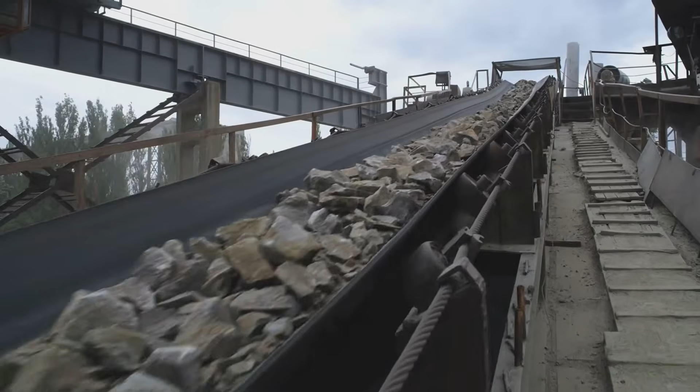However, this battery-powered transformation is not without its challenges. The demand for raw materials like lithium, cobalt, and nickel is soaring, raising questions about sustainable mining practices and supply chain ethics. Building out a robust and rapid public charging infrastructure is a massive undertaking that is crucial for long-distance travel. And the end-of-life management for these enormous battery packs presents a complex recycling and disposal puzzle that the industry is actively working to solve.

The electric drive is reshaping our world, but it is also forcing us to confront new and complex questions about energy, resources, and the true cost of mobility.

Beyond our personal devices and vehicles, batteries are beginning to play a new and critical role on a much larger scale, stabilizing our electrical grids. The world is increasingly turning to renewable energy sources like solar and wind power to meet its electricity needs. These sources are clean and sustainable, but they have a fundamental challenge: they are intermittent.

The sun does not always shine, and the wind does not always blow. This variability can make it difficult for grid operators to perfectly match electricity supply with demand at every moment of the day, which is essential for a stable power system.

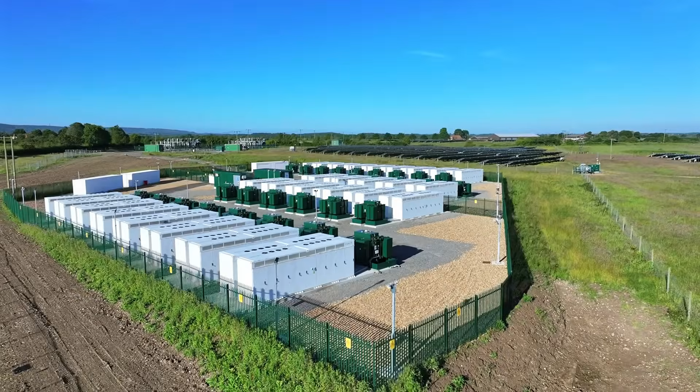This is where large-scale battery storage systems come in. These grid-scale batteries, often housed in large buildings or rows of shipping containers, are filled with thousands of battery modules, much like those in an electric car. They act as giant energy reservoirs.

When renewable energy production is high but demand is low, for example on a sunny and windy afternoon, these batteries can absorb the excess electricity and store it. Then, when demand peaks in the evening and the sun has set, the batteries can discharge that stored energy back into the grid, ensuring a reliable and continuous supply of power.

This capability is a game changer for the energy industry. It allows us to capture clean energy that would otherwise be wasted and deploy it when it is most needed. This makes the grid more resilient, efficient, and less reliant on peaker power plants, which are often the most polluting and expensive fossil fuel plants that fire up only to meet high demand.

In essence, batteries help to smooth out the peaks and valleys of renewable energy generation, creating a more stable and reliable foundation for a clean energy future. They are the missing piece of the puzzle that makes a 100% renewable grid a tangible possibility rather than a distant dream.

These systems are also being deployed at a smaller scale, in homes and businesses. A home battery system, often paired with rooftop solar panels, allows a homeowner to store their own solar energy for use at night or during a power outage. This provides energy independence and can lower electricity bills.

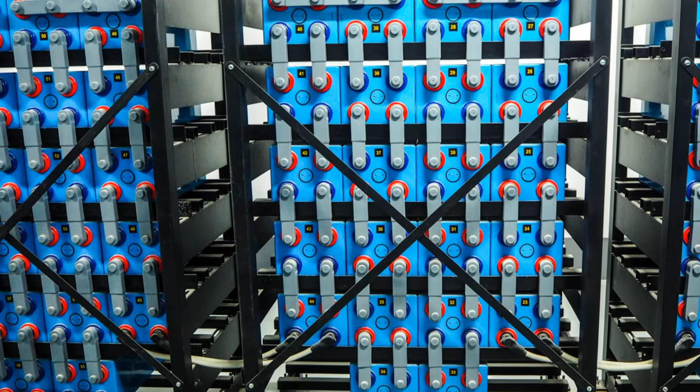This concept of backup power extends to the vast infrastructure that underpins our modern society. Data centers, the digital hearts of our global economy, are protected by massive rooms filled with batteries to ensure that our cloud services, financial transactions, and communication networks never go down.

Cell phone towers have battery backups to maintain service during emergencies, which is often the only way for people to call for help or receive critical information. Even traffic lights have small battery systems to prevent gridlock and accidents during a blackout.

In these applications, the battery is a crucial form of insurance, a silent sentry waiting to perform its vital function at a moment's notice. The impact is also deeply personal and life-sustaining.

For millions of people around the world, a tiny, specialized battery is the only thing keeping them alive. Implantable medical devices like pacemakers and defibrillators use highly reliable, long-lasting batteries to regulate a person's heartbeat for a decade or more. The chemistry in these batteries is designed for ultimate reliability and safety within the human body, providing a steady, low-power current year after year.

Similarly, hearing aids and cochlear implants rely on tiny, powerful button cells to restore a connection to the world of sound. For these users, the battery is not a convenience, it is a lifeline.

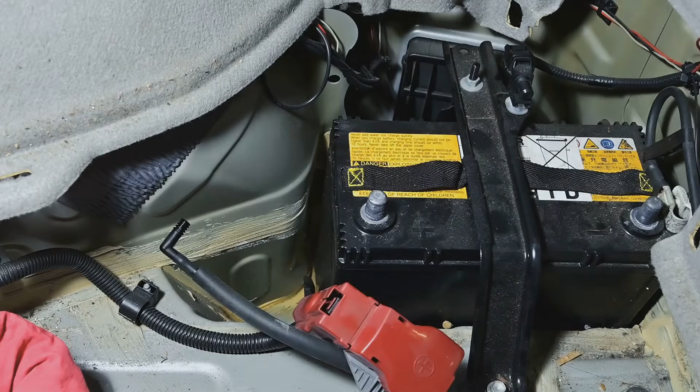This unseen impact highlights the profound trust we place in battery technology. We trust these devices to start our cars, to protect our data, and in many cases, to keep us healthy and safe. This trust is built upon the decades of research and the meticulous manufacturing and testing processes we have explored.

From the global data network to the beating of a human heart, batteries provide the reliable, portable, and life-sustaining power that supports the hidden framework of our world. They are the quiet heroes of our technological age, working tirelessly in the background to ensure our world runs smoothly, safely, and without interruption.

As we stand on the cusp of a new energy era, the limitations of current lithium-ion technology are becoming increasingly clear. While it has powered our modern world, the search for its successor is one of the most urgent quests in materials science today. Scientists and engineers around the globe are in a race to develop the next generation of batteries, striving for a breakthrough that will be safer, more powerful, and built from more sustainable materials.

The goal is to create a battery that can charge in minutes instead of hours, last for thousands of cycles without degrading, and eliminate the reliance on expensive and ethically challenging materials like cobalt. This is the holy grail of energy storage research. One of the most promising contenders in this race is the solid-state battery.

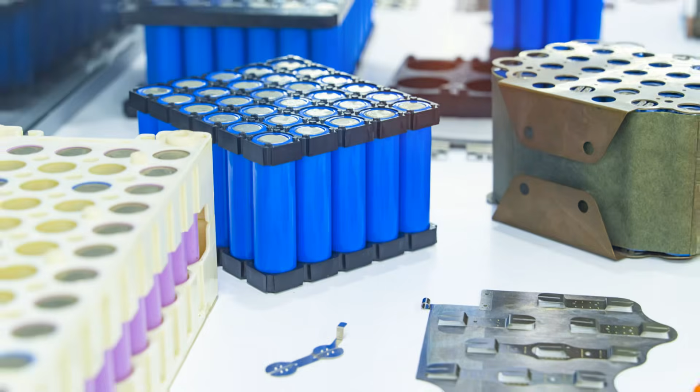By removing the flammable liquid, solid-state batteries promise to be far safer, virtually eliminating the risk of fires that can plague current designs. Moreover, a solid electrolyte enables the use of a pure lithium metal anode, which has a much higher energy density than the graphite anodes used today. This could lead to batteries that store twice as much energy in the same space, meaning an electric car could travel much farther on a single charge.

Another exciting area of research focuses on chemistries that move beyond lithium entirely, using elements that are more abundant and cheaper to source. Sodium-ion batteries, for example, operate on a very similar principle to lithium-ion but use sodium, an element that is thousands of times more common and can be extracted from seawater. While currently less energy dense than their lithium counterparts, they are a promising low-cost solution for large-scale grid storage, where weight is less of a concern.

Similarly, researchers are exploring zinc-ion, aluminum-ion, and even iron-air batteries, each offering a unique set of advantages in terms of cost, safety, and material availability for a sustainable energy future.

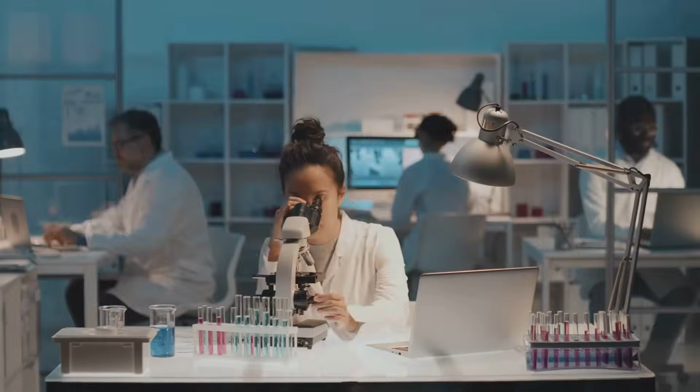The path from a laboratory breakthrough to a mass-produced product is long and fraught with challenges. New battery chemistries must not only perform well, but must also be manufacturable at a massive scale and at a competitive cost. It requires developing entirely new supply chains, retooling factories, and ensuring the technology is durable and reliable over many years of use. While it may be some time before these next-generation batteries are powering our phones and cars, the incredible pace of innovation is undeniable.

The future of batteries promises not just an incremental improvement, but a fundamental leap forward in how we store and use energy across society.

The explosive growth of batteries, particularly the massive packs used in electric vehicles, presents a monumental environmental challenge. What happens to them at the end of their life? A single EV battery can contain hundreds of kilograms of valuable and hazardous materials. Simply discarding these batteries in landfills is not only an environmental hazard, but also a tremendous waste of precious resources.

The future of batteries must therefore be a circular one, where the end of one battery's life becomes the beginning of another's. This means creating a robust and efficient system for collecting, dismantling, and recycling every battery we produce.

The goal of battery recycling is to create a closed-loop system. In this system, old batteries are treated as a rich urban mine from which valuable materials like lithium, cobalt, nickel, and copper can be extracted and returned to the manufacturing supply chain.

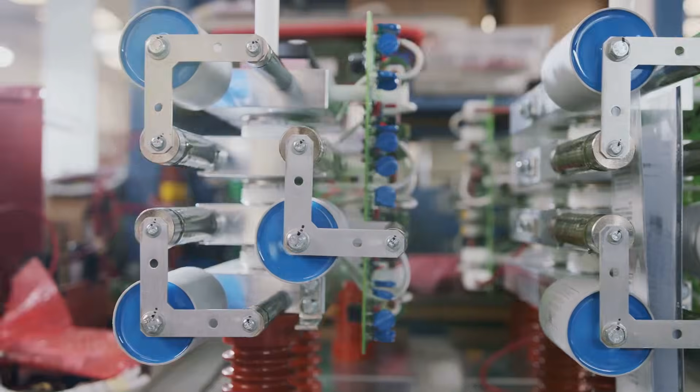This reduces our dependence on new mining, which can be environmentally destructive and geopolitically complex. By recovering these materials, we can lower the carbon footprint of battery production, conserve natural resources, and create more resilient and localized supply chains. Making recycling an integral part of the battery life cycle is essential for the long-term sustainability of our electrified world.

Currently, two main methods are used for lithium-ion battery recycling. The first is pyrometallurgy, a brute force process that involves smelting old batteries at extremely high temperatures to recover a few key metals like cobalt and nickel. While effective, this process is very energy intensive and does not recover all materials, such as lithium.

The more advanced method is hydrometallurgy, which uses a series of chemical leaching processes to dissolve the battery materials into a solution, from which high-purity metals can be selectively recovered. This method is more precise and can recover a wider range of materials, including lithium, with a lower energy footprint.

Building a truly circular battery economy requires more than just efficient recycling technology. It demands collaboration across the entire industry. It means designing batteries from the outset with disassembly and recycling in mind, a concept known as design for recycling. It requires new regulations and incentives to encourage consumers and businesses to return old batteries. It also means developing a sophisticated logistics network to safely transport and handle millions of used battery packs.

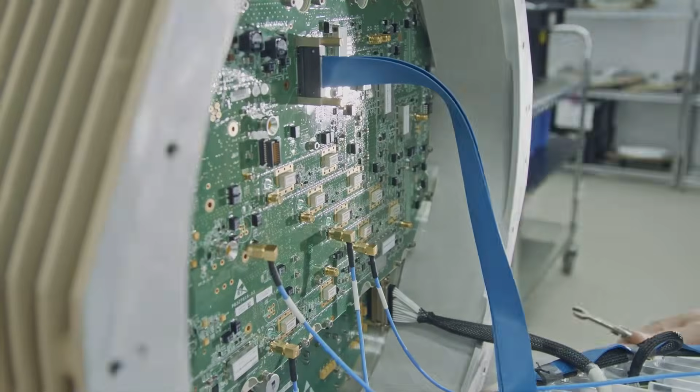The future of batteries is not just about new chemistries and materials. It is also about the intelligence that manages them. A modern battery pack, whether in an electric car or a grid storage system, is far more than a simple collection of cells. It is a sophisticated cyber-physical system, governed by a complex piece of software known as a battery management system, or BMS. This embedded software is the brain of the battery, constantly monitoring the state of every cell, balancing their charge, managing temperature, and ensuring the pack operates safely and efficiently within its limits.

As batteries become more powerful, the role of this software becomes ever more critical. The next great leap in battery performance will come from making this software smarter, primarily through the use of artificial intelligence and machine learning. AI algorithms can analyze vast amounts of real-world data from millions of batteries operating in the field. By learning from this data, an AI-powered BMS can create a digital twin, a virtual model of the battery that understands its unique health and aging characteristics. This allows the system to make much more accurate predictions about the battery's remaining range, its state of health, and its overall lifespan, providing users with more reliable and transparent information about their device's power source.

This intelligence can also actively extend the life of the battery. For example, an AI system could learn a user's daily charging habits and optimize the charging process to minimize stress on the battery cells. It might delay charging to 100% until just before the user typically unplugs, as keeping a battery at full charge for long periods can accelerate degradation. In an electric vehicle, the AI could precondition the battery temperature before a fast charging session to maximize charging speed and minimize cell damage. These small, intelligent optimizations, performed consistently over the life of the battery, can add up to a significant increase in longevity and performance.

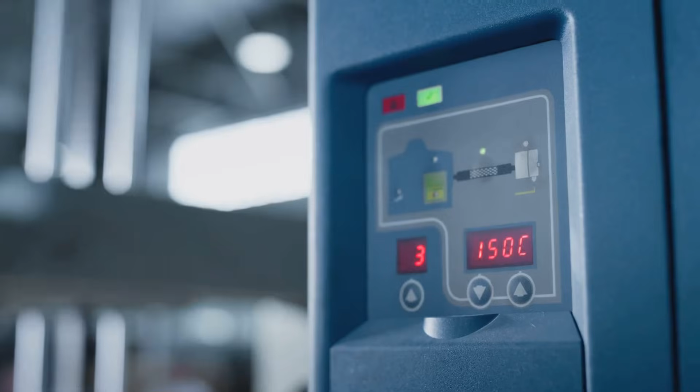Ultimately, software and AI are becoming a crucial layer of safety. By constantly analyzing subtle changes in voltage, temperature, and internal resistance, AI can detect the early warning signs of a potential cell failure long before it becomes a dangerous problem. It could then alert the user or even automatically isolate the faulty part of the pack to prevent a thermal runaway event. This fusion of advanced chemistry with intelligent software is transforming the battery from a passive component into an active, self-aware system. The future battery will not just store energy, it will manage it with an unprecedented level of intelligence, making our devices safer, longer lasting, and more reliable than ever before.

As our journey from the first spark of discovery to the automated factory floor comes to a close, we are left with a vision of a future profoundly shaped by the humble battery. The continued evolution of this technology is not merely about creating better gadgets or faster cars. It is about fundamentally reshaping our relationship with energy itself.

We are moving from a world built on centralized, combustible power to one that is decentralized, renewable, and stored. The battery is the key enabling technology for this historic transition, the linchpin that connects a clean energy source like a solar panel to a final use like a home appliance or an electric vehicle.

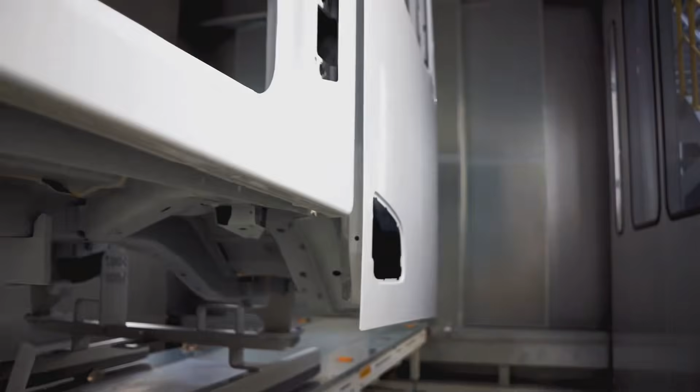Imagine a world where energy is abundant, clean, and accessible to all, where remote villages, far from any centralized grid, can be powered by local solar panels and community battery storage, unlocking new opportunities for education, healthcare, and economic development. Imagine cities where the air is clean, free from the noise and fumes of combustion engines, and the entire transportation fleet, from cars and buses to delivery drones and even short-haul aircraft, runs on silent, efficient electric power. This is not a distant fantasy. It is the tangible future that battery technology is helping us build, one cell at a time.

The battery also promises to make our energy systems more resilient and democratic. When millions of homes, businesses, and vehicles are equipped with their own battery storage, they form a vast, distributed network of energy resources. This network can support the grid during times of peak demand or emergencies, reducing the likelihood of large-scale blackouts. It gives individuals and communities more control over their energy, turning them from passive consumers into active participants in a cleaner, more robust energy ecosystem. The battery empowers us not just with portable power, but with energy, independence, and security in an uncertain world.

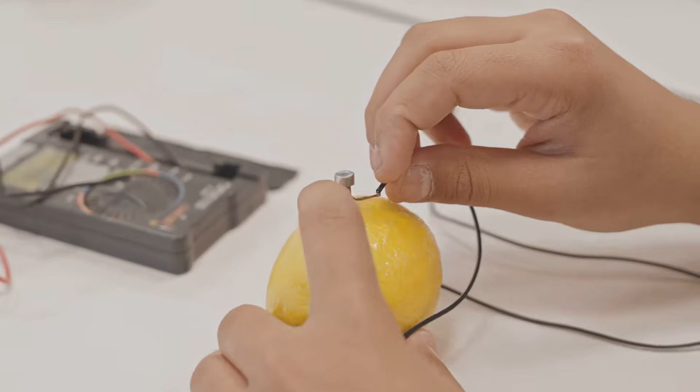The story of the battery is ultimately a story of human ingenuity and our relentless pursuit of a better future. From a simple pile of metal discs to the incredibly complex and intelligent power packs of tomorrow, the battery is a testament to our ability to unlock the hidden potential of the world around us. It is the silent, unseen engine that will power a cleaner, smarter, and more equitable world. As we continue to innovate, refine, and perfect this essential technology, we're not just charging our devices, we are recharging our planet and empowering the generations that will follow. The future is electric, and it will be carried in the heart of a battery.